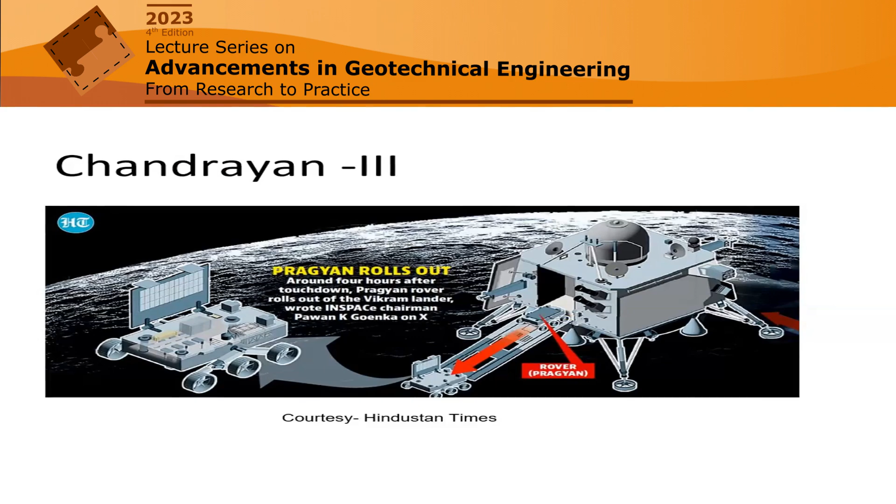So considering this, let me start with the recent news, that is Chandrayaan-3. If you look at the figure, which has become something everybody is talking about these days and has become news throughout, what it says, why we are very much excited about it, is that there is a scope - is it possible to go there and have some habitation? And that way it has generated lots of interest amongst youngsters, and in fact through this generation.

My topic is on Indian fly ash, but in fact, I have compared it with other fly ashes from different parts of the world.

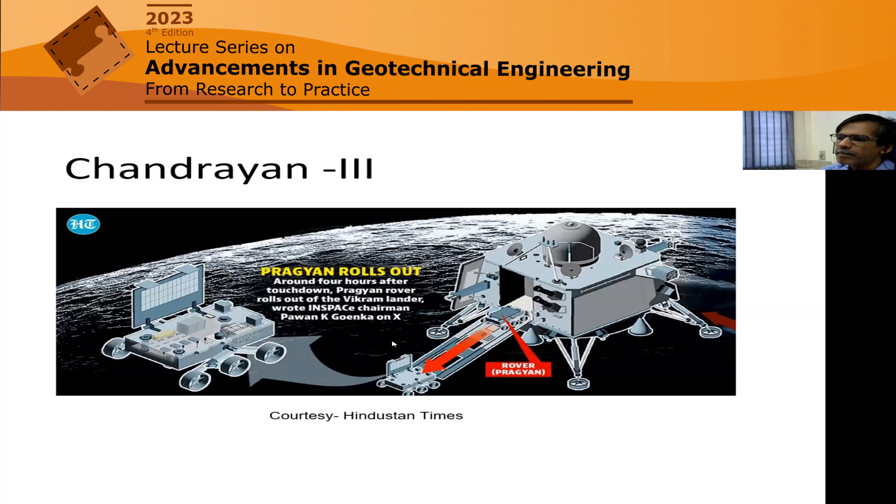What is this Earth? Because we are on Earth. Now we want to go to Moon, or we are saying we have got lunar soil. This Earth has been there so many years, and different peoples have tried to investigate it.

When it comes to chemistry or alchemy, this soil they found - in ancient India also, they said that this is a source of drugs. So for them, this earth or geomaterial was the source of drug. In fact, Ayurveda, another science of life, also said a good clay which has got very good fragrance is suitable for cultivation of grains and vegetables. That is good for life.

But when it comes to engineering, in the Indian context, in Sanskrit, they were saying Shilpa Shastra - that earth is required for us to build the structure.

And now, what do we call soil? The soil scientists say that it should be a mixture of organic matter, minerals, gases, liquid, microbes that can support plant and life. That's why when you say geomaterial, this is earth.

How am I getting it? Now if you see, we have got different sources: surface sand deposit, river sand deposit or marine sand deposit, and terrestrial hard rock deposit. Through this, we are getting the industrial building materials required, which is sand, gravel and crushed rock.

So as I said, earth can be the source for different professions, but for our profession as civil engineering, it is the source of sand, gravel and crushed rock, which is required for infrastructure development. Initially sand deposit was good, and we are still using it. River sand deposit is still continuing, but in certain places it is banned. Now we are coming to hard rock, which we are crushing to get our required material.

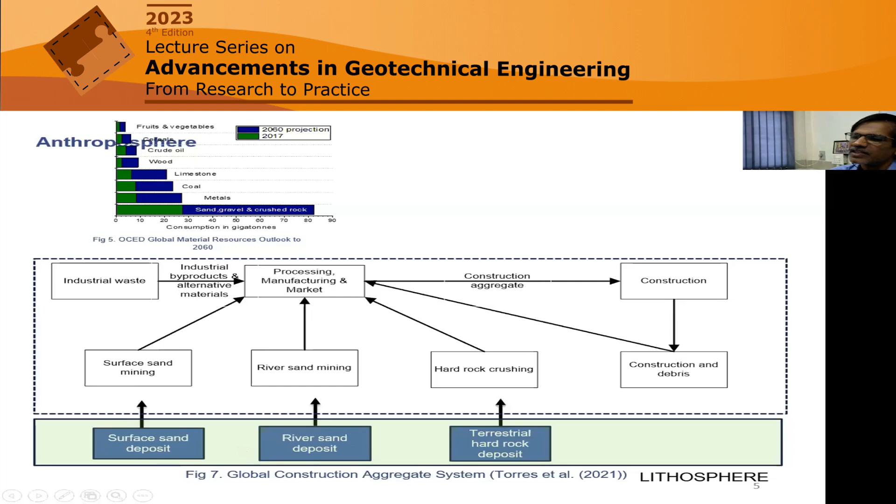Combining these two, what we are saying is sustainable geomaterial, from this geo-environment, what we call this earth, mother earth. So we are trying to go for mining for extraction of minerals.

The first one you'll see, pointed here, is an iron ore mine, and the bottom one is a coal mine. We need the iron ore or coal for industrial activities. While going for that, some of this is not useful, so we throw it, calling it mine overburden or tailings.

And when you go to industry, we have got steel industry or thermal power. Both of them, after producing steel or generating electricity, also have some byproducts. All these are dumped at a certain place, and if not properly managed, they create hazards. For that reason, we need to characterize these materials for valorization, so they can be resources as an alternative geomaterial.

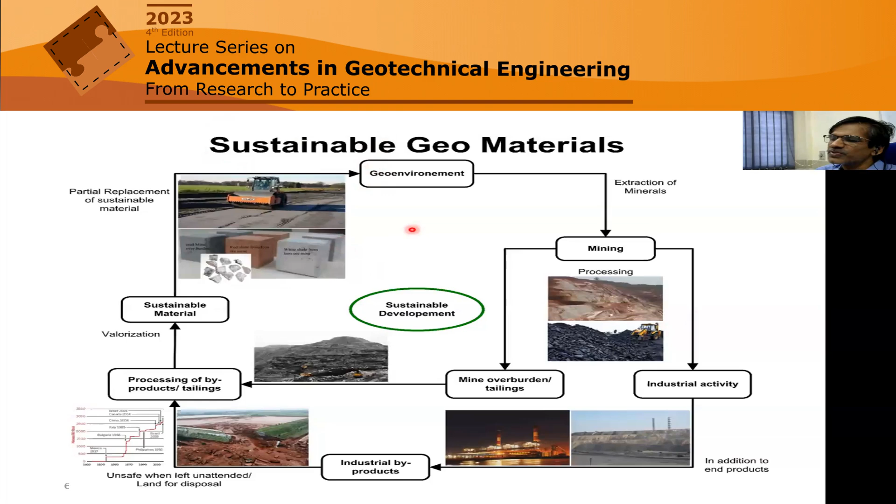Look at the Indian context. India has also signed the 2030 SDG goals to reduce carbon generation and so on. But still 71% of the electricity in India is generated by coal. The rest is by other sources, including hydro, nuclear or renewable resources.

So when this coal, and Indian coal has got a high percentage of ash, look at the generation of this fly ash, which is almost exponentially increasing over the years, from 1996, over 26 years. It's exponentially increasing.

Though we are trying to match the percentage of use in comparison to when generation was less and utilization was also less. In fact in the 90s it was only 5% utilization, now we have come to 90%. But since this is more than 260 million tons, even the remaining 10% is still 26 million tons unutilized, after using 90%.

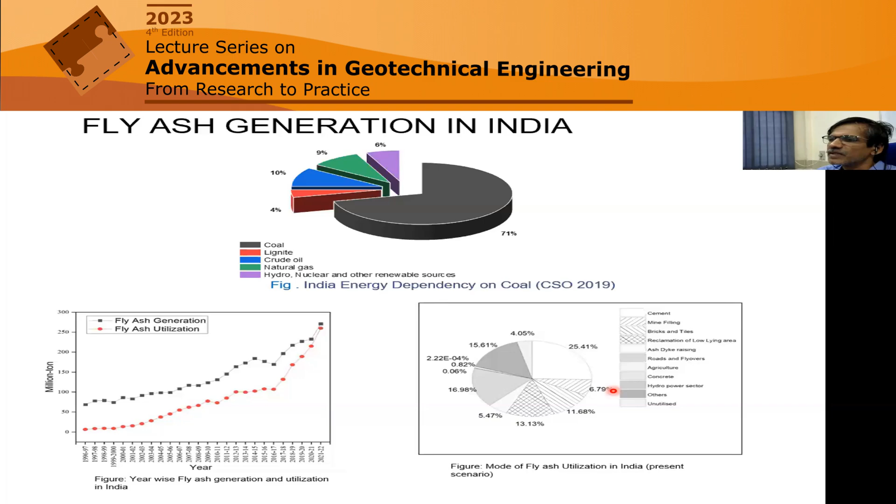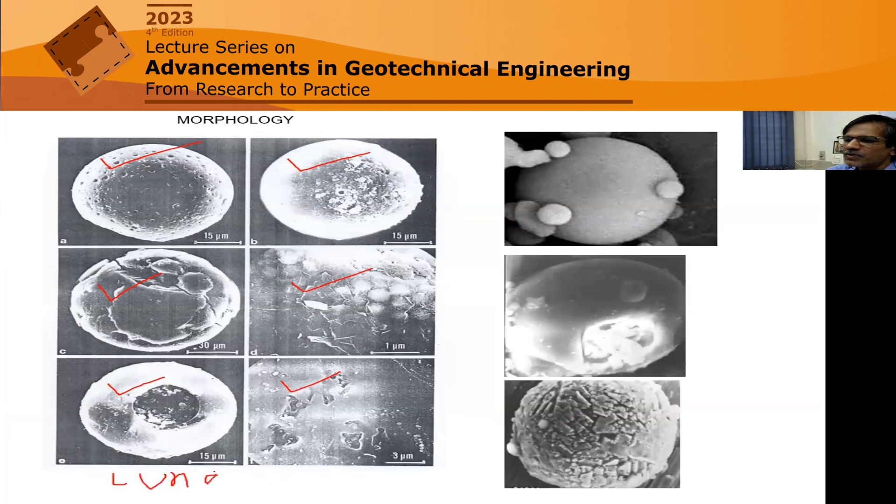So these are some of the pictures which I have visited and got. Now I have shown you two pictures of what we call morphology. You'll be really surprised to know that what you are able to see on the left-hand side is lunar soil. That's why I didn't label it. So this is lunar soil, and on the right-hand side is fly ash.

So just see, there are certain similarities. This lunar soil has been collected by Apollo and NASA, and you can get it from the reference books also. So here I wanted to say that there are certain similarities, so if you are studying this, you may be motivated to know its morphology.

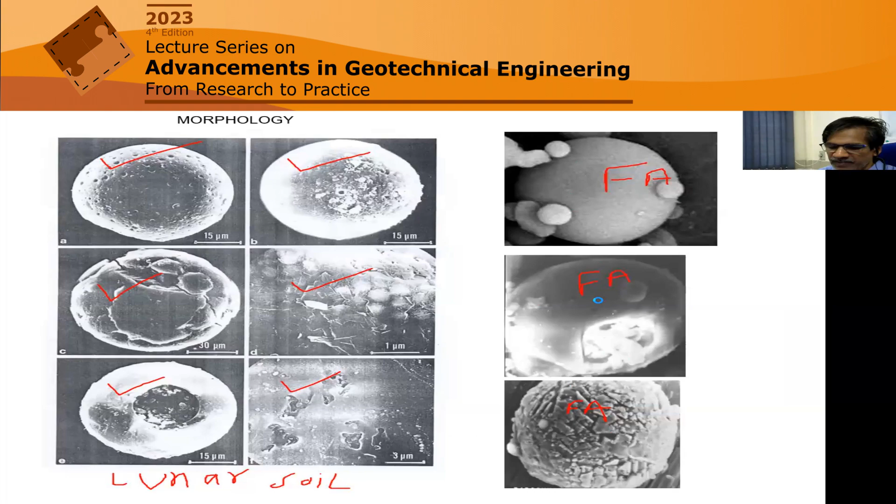Then again, for its utilization, we need to check. Because in the previous slide, the fly ash was looking very smooth surface. Here it was a rough surface, but in these two, it was a smooth surface. What are the smooth surfaces? In one of my investigations, I had dissolved it with hydrofluoric acid, which showed that it is mostly aluminosilicate. Inside, there is again a good structural spherical form on which the skeletal aluminosilicate glass was there.

So this indicates that the top surface is reactive and it can react. Whereas in some other fly ash, this was rich in iron particles, so it was not taking part in reaction the way the small patches were. They were being utilized for cementitious reactions, or because this was high calcium fly ash, it can be used as cementitious or pozzolanic, both. But in this case, it is only pozzolanic at the top surface. So this material characterization through morphological identification is important if you want to really study its utilization.

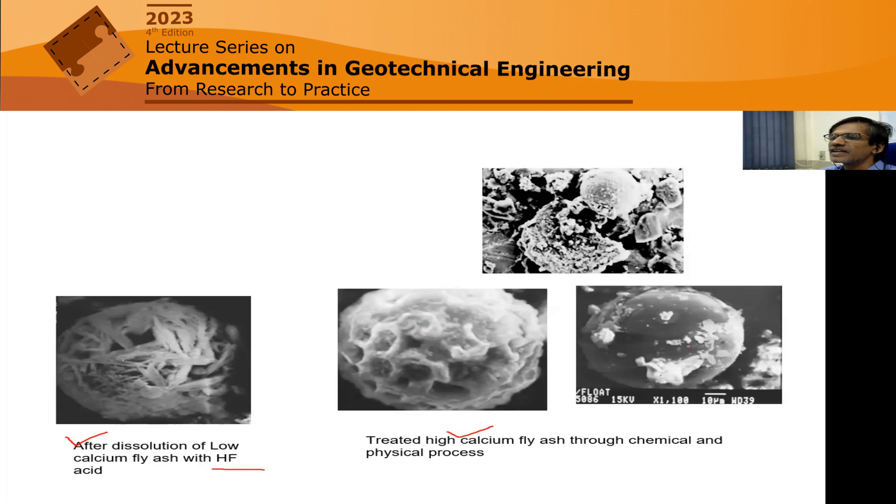Next comes chemical composition, which is again important. Here, along with fly ash, I have put all other industrial waste like bauxite residue, red mud, steel slag from the steel plant, ground granulated blast furnace slag, ferrochrome slag, iron tailing, bottom ash from the thermal plant, and overburden from the coal mine.

Look at the fly ash. If you see the chemical composition, it's not very different from common soil. Depending upon the type of fly ash, the lime content may vary from almost 0.5% to 30%, and magnesium oxide from 0 to 8.39%. In fact, this chemical composition is very similar to many places with soil we are encountering.

Whereas in comparison, bauxite residue is very high in iron content or calcium content, or in fact sodium content also, with very high pH. But this fly ash has got a moderate pH, which is an advantage. In fact, blast furnace slag also contains a very high amount of lime content, which is not a common characteristic of a general soil. Ferrochrome slag contains a good amount of magnesium oxide, which is expansive, and also chromium. Though this chromium is not carcinogenic, it is still a heavy metal, and higher consumption is not good.

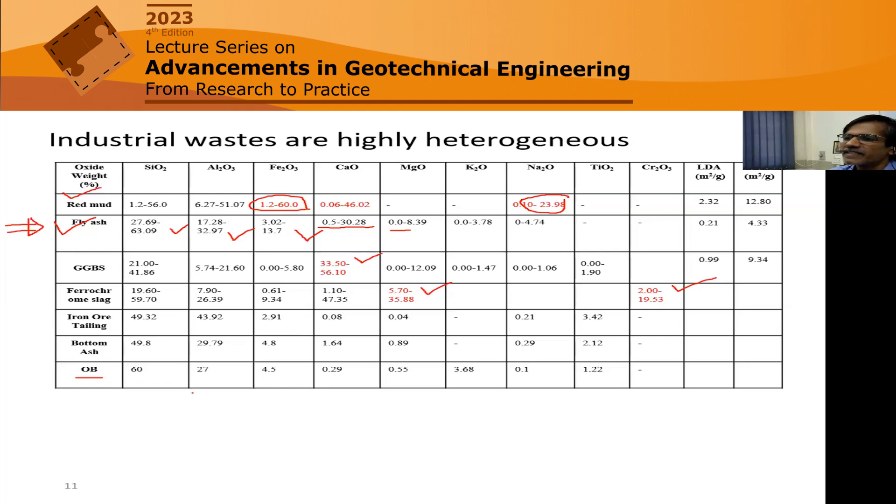Now we have got information about the fly ash. In fact, sometimes what we are doing with the fly ash may be helpful if somebody goes for this, but I am talking about, there are lots of things to be investigated.

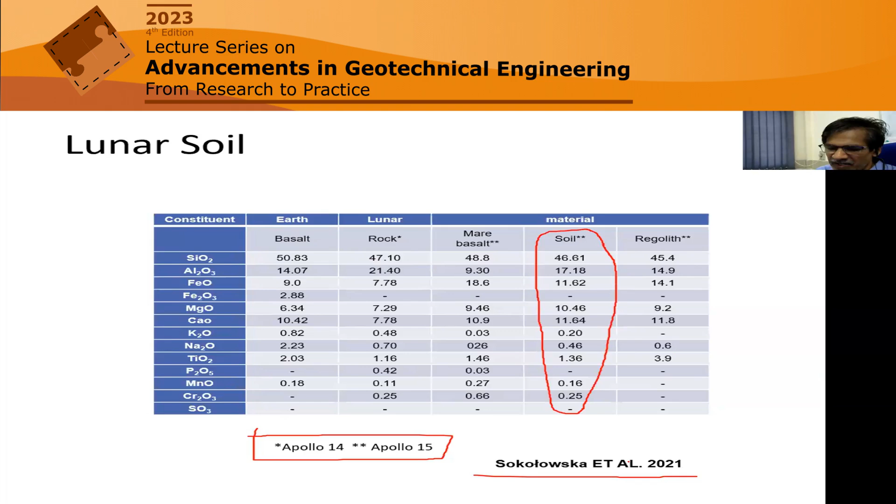Based on this chemical composition, initially, as per ASTM, it was divided into only two groups. Class F, which is rich in aluminum, silica, and iron content, more than 70%, but with a low amount of calcium oxide content, maximum 4 to 8%. Whereas the other group was Class C fly ash, where the silica, alumina, and iron content is less than 70%, but the calcium content can go up to 32%. So this was the initial classification of fly ash based on chemical composition.

But now, further, it has been divided into different groups. This will tell you also its basicity and acidity based on the composition of calcium, magnesium oxide and sodium oxide, which are alkali compounds, or alumina and silica compounds, the acidic compounds.

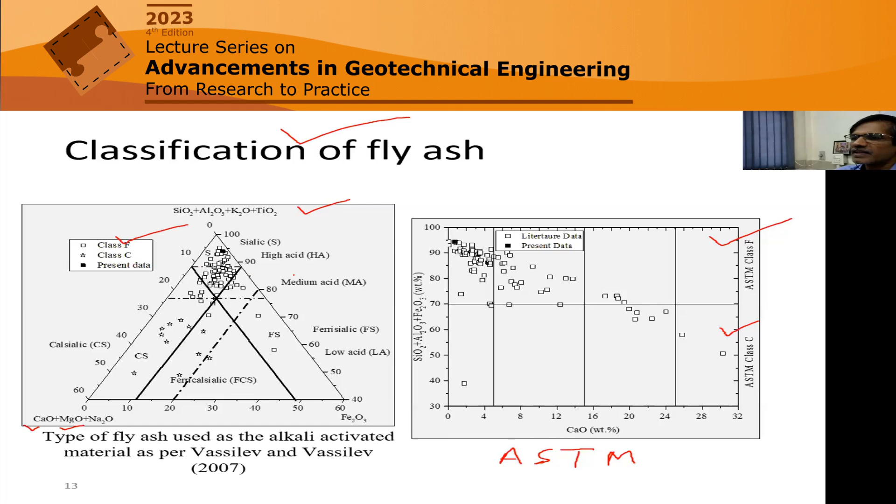Based on this, if we go further, what we call mineralogy explains the glassy phase in it, which in fact is responsible for the chemical reaction or pozzolanic reaction. The pozzolanic reaction, by definition, should be in glassy phase. Because the major portion of the fly ash is in glassy phase, we call it also pozzolana. In fact, when we add it into cement, we say Portland pozzolana cement.

So here, to know what type or how much percentage of glassy phase is there: if you go to the lime content, it tells you the position of this, so this will tell you what is the type of glass. Second, if you take a molar ratio of potassium oxide to aluminum oxide, it can tell you what is the glass content of it. So you need two things: what is the type of glass and what is the quantity of glass or glassy phase.

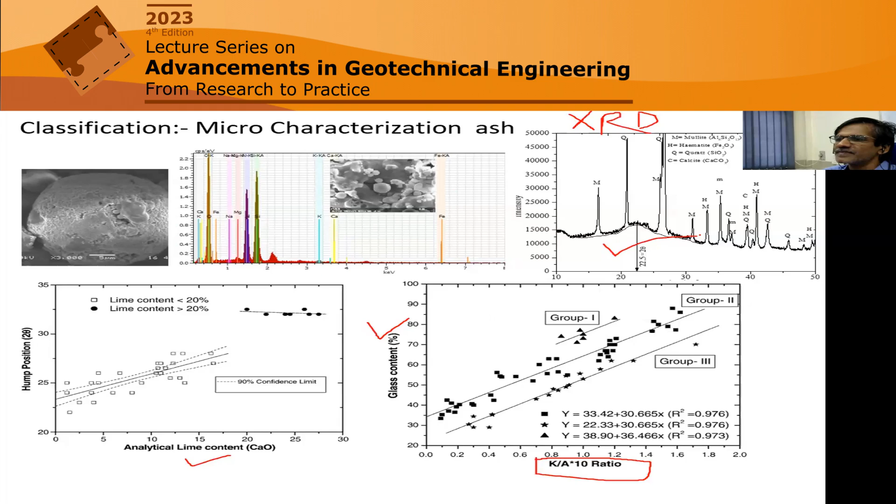Next, to be again very specific to geotechnical engineering, because I was saying geomaterial. Geomaterial, as I said in the very beginning, can be used in construction of buildings, in cement, or in other places, and for the soil scientist as a source for plants. But when it comes to geotechnical engineering, we become very specific. We take its percentage of clay, silt, and sand size, and accordingly we try to define the soil as a clay soil, silty soil, sandy soil, or a combination of all these.

So here I have shown some of the sources of fly ash in India, where the variation of silt, clay, and sand size is presented. If you see, mostly it is silt size particles. Major portion is silt. What else? The specific gravity is very low compared to standard geotechnical material, where we say 2.65 for sand and 2.7 for clay. But in this case, it can go down to 1.95. So this is not what we get for natural soil, so accordingly, the soil classification will be different.

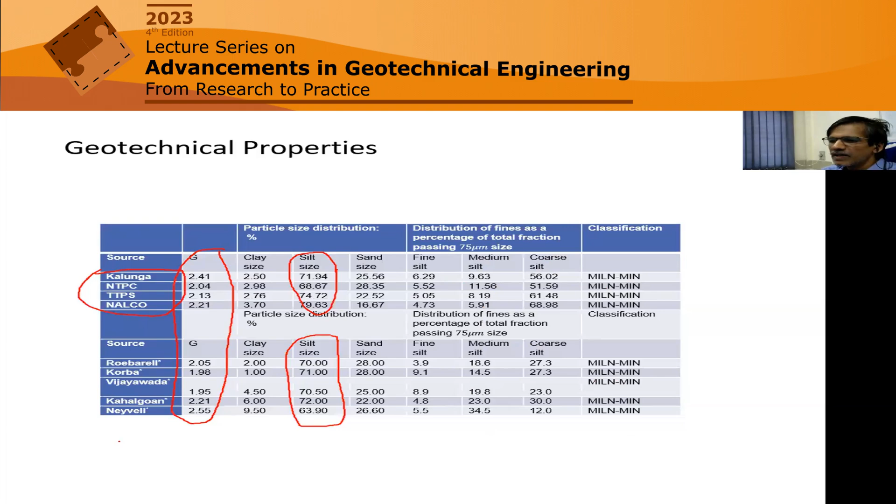So less could be the dry density, because initially in our geotechnical construction for embankments and so on, there was some restriction on what should be the minimum density of the soil to be used for embankment. So for that reason, we are investigating what should be the density of it. I mean, sorry, what should be the maximum dry density of it?

Another issue is that in the same plant, there could be lots of variation in quality control. It's not like a borrow area soil you have taken, where the OMC and MDD remain constant. These will vary depending upon the fluctuation in the power also. That will give different types of fly ash. So quality control is very important when you are particularly using a particular source of fly ash.

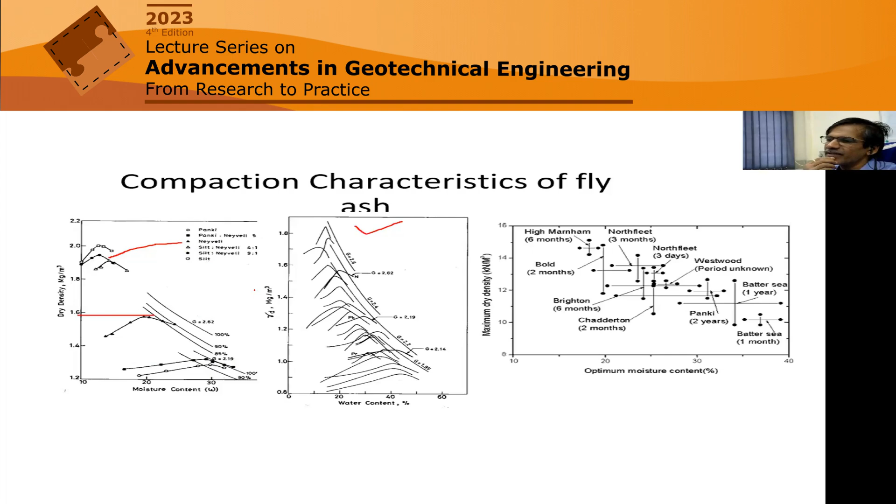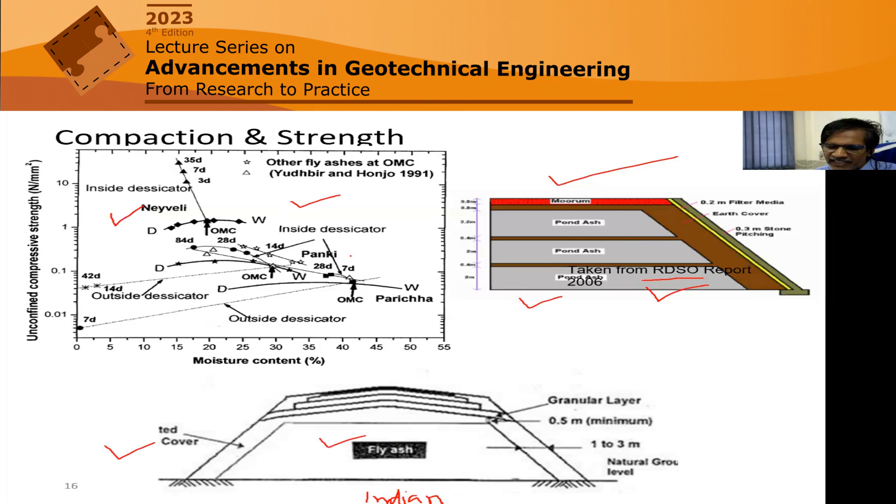So here, if Portland cement was rich in calcium, this geopolymer has a very low amount of calcium. And I have shown you the diagram for the chemical composition of fly ash. Low calcium, but it has a very good amount of aluminosilicate, which is the major requirement of this geopolymer. So for that reason, it is now being tried, at least at laboratory scale, to be used as a precursor for this third generation cement called geopolymer.

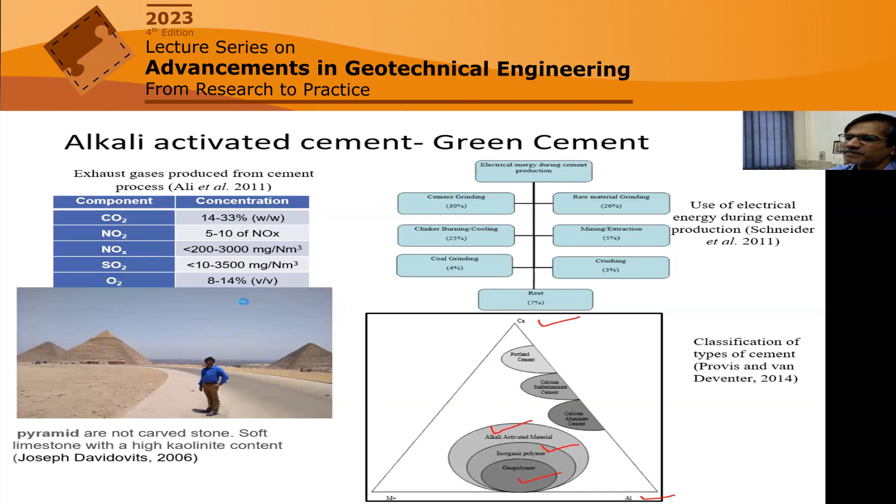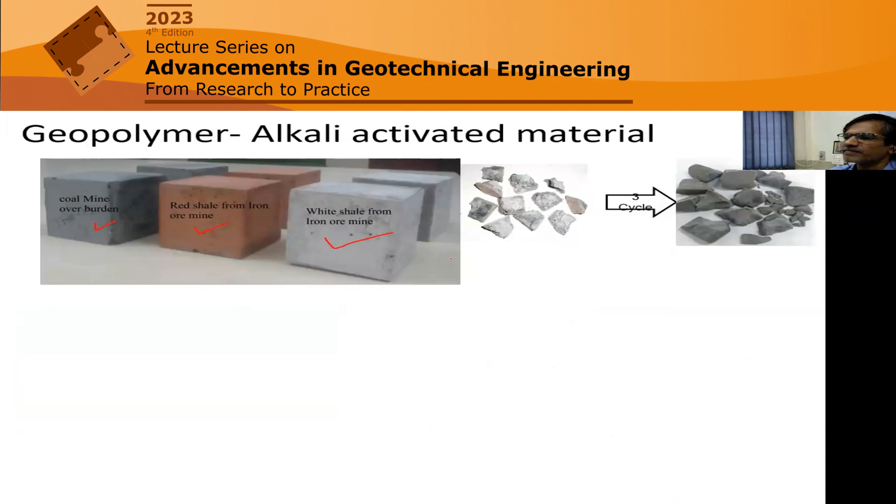So it's not a very common material in geotechnical engineering, and it is basically not part of concrete, though we say it's prepared similar to a concrete material, but the strength is less. So we use ordinary geomaterial with the strength varying from 0.5 MPa to 8 MPa. Whereas concrete, they start with minimum 20 MPa.

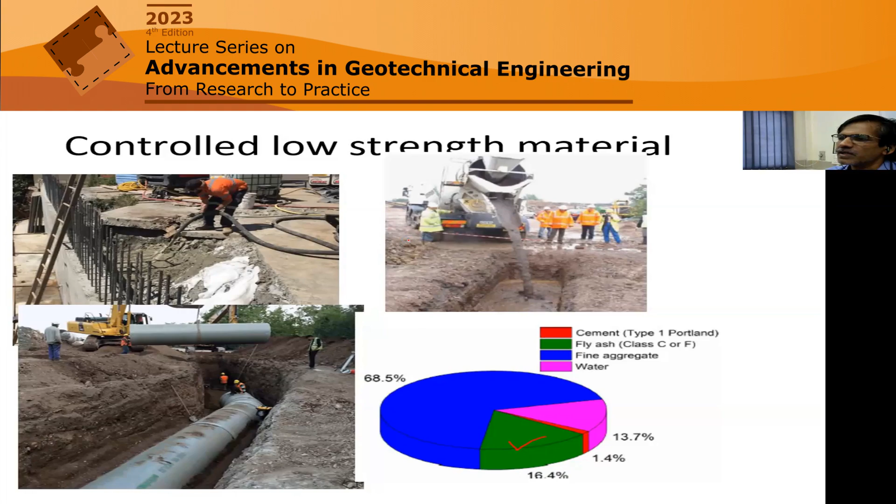So these are some of the guidelines if you are going to use CLSM: that it should have good flowability characteristics. It should have a setting time like that of a cement. It should have a good unconfined compressive strength like that of a soil. It should not affect the nearby structure also. It should have good resilient modulus if you are using it for unpaved roads. It should have good CBR if you are using it for the base or sub-base course. And also water permeability for base and sub-base courses.

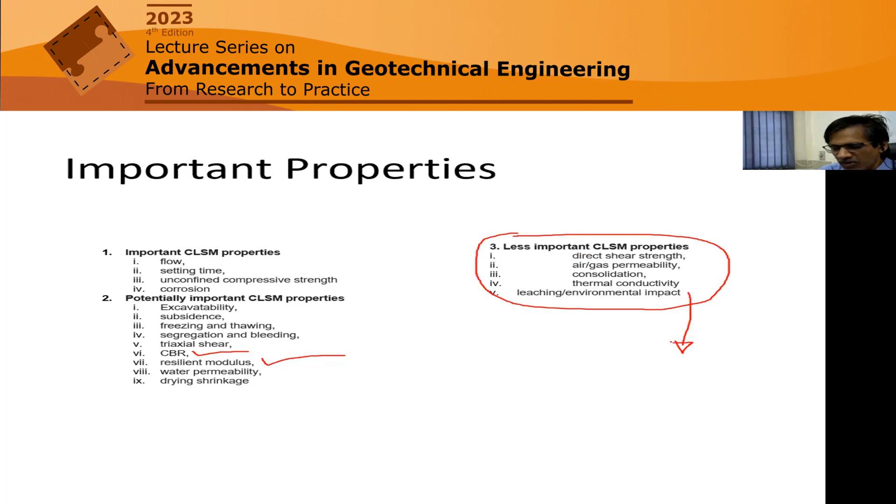And the less important CLSM properties are like direct shear strength, gas permeability, consolidation. But the leaching impact, initially when this recommendation came, was not taken as important, but now it has become important.

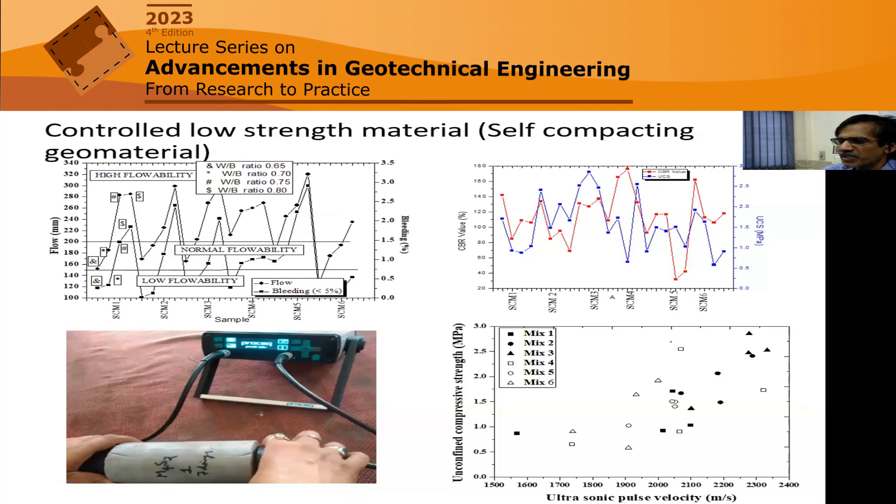So this is one typical study on controlled low strength material, where fly ash could be the major material to increase flowability. And this is possible because the particles are spherical in nature. That's why it is also called a mineral admixture. So the spherical particle is not good for its geotechnical properties, but it is good for its flowability properties if you are using it for low strength material. So with this blending you have to be very careful how much material you are using.

Now, before closing, when we were trying to use this fly ash, initially it was only going through its chemical mineralogy, strength and other properties. Now it has become more important to check the sustainability aspect, where its environmental impact, economy and social acceptability are to be considered, leaving aside the technical part. And this material comes immediately from the power plant, within an hour or half an hour, in comparison to natural soil, which has been regenerated over millions of years. So this resilience aspect has not been considered and now needs to be considered.

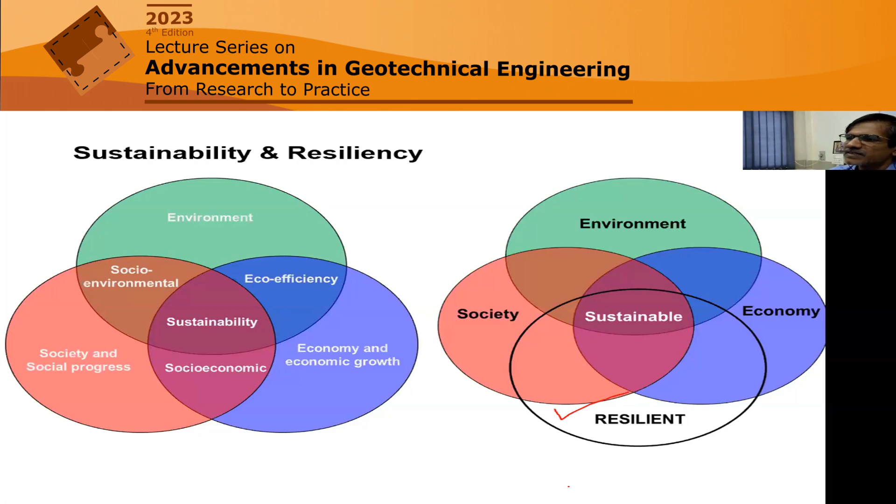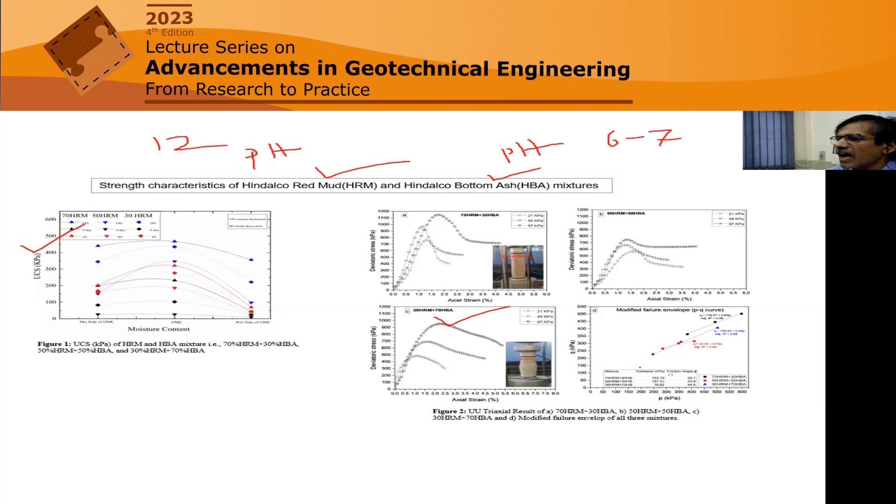So here I'll try to show some of this, considering sustainability, when I try to use bauxite residue stabilized or mixed with bottom ash, because here the pH is high, pH is 12, and here the pH is low, close to 6 or 7. So we try to blend it to get a different material, and we check the strength, stress-strain diagram, and the other properties. But that is not sufficient. First you have to check its durability under different conditions, particularly wet-dry cycles, and how much strength it gains after 12 cycles.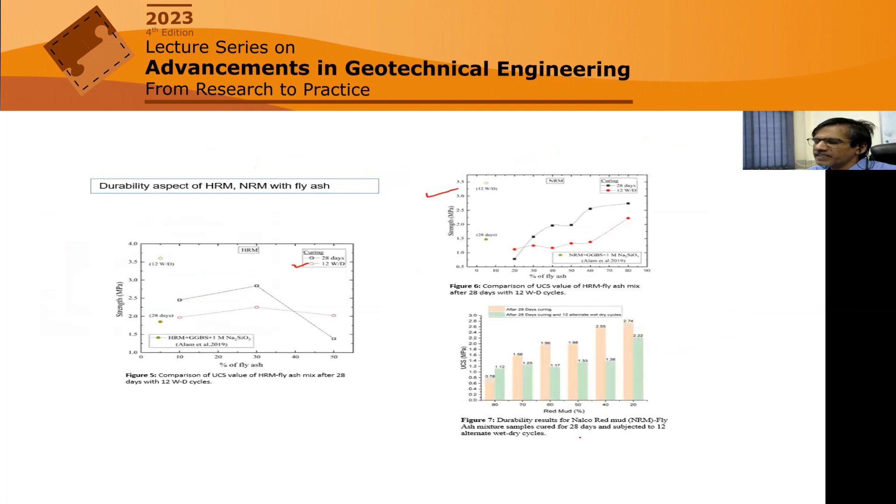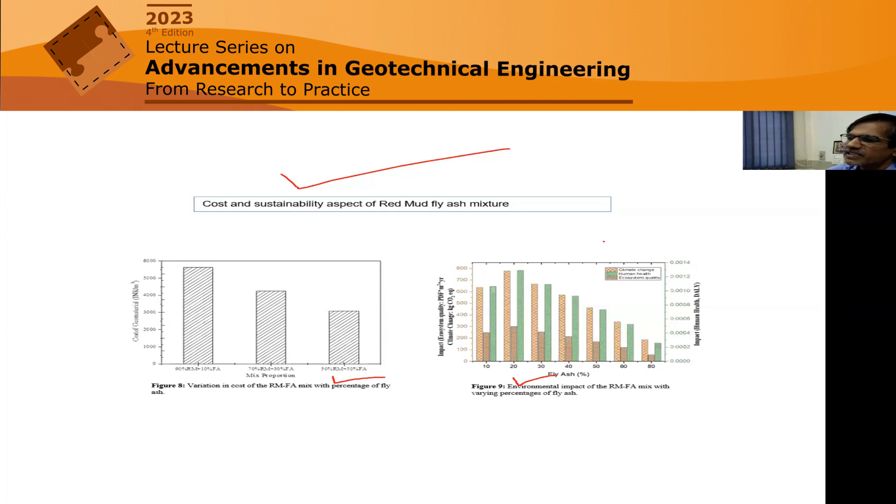This is what we call sustainability. Cost wise, for different proportions, as I'm increasing the fly ash percentage, the cost is less, and the environmental impact is also decreasing as I increase the fly ash. So this extra aspect now needs to be considered. I don't want to present this study in detail, but this has become an essential aspect of any study on utilization of industrial waste, including fly ash.

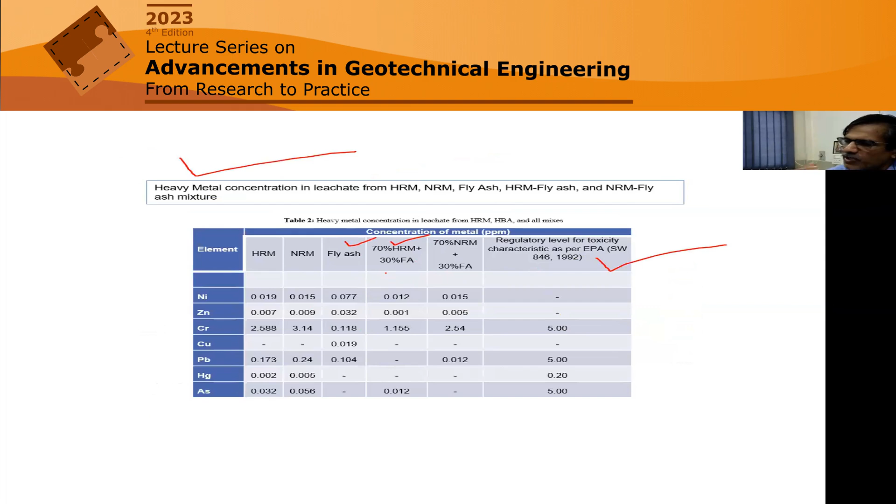So with this, I'll come to the conclusion: though we are all committed to reducing the carbon footprint, as we are still depending upon coal as the major source of energy, fly ash is the major industrial waste in India. As I said, for any material, we need to look at different angles for its utilization. So if you are looking at its utilization as a geotechnical engineering material, or as an aggregate in the construction industry, then you have to be very specific about these characterization aspects.

Finally, all the time I say this statement: we are still ignorant about this fly ash. That's why people are still calling it a waste, or whoever is producing it feels it as a burden; it becomes a liability to them. But if we can really characterize it and gain sufficient knowledge, we can convert it into wealth. So for the corporates who are producing this fly ash, it will be a resource instead of what they are calling a liability.

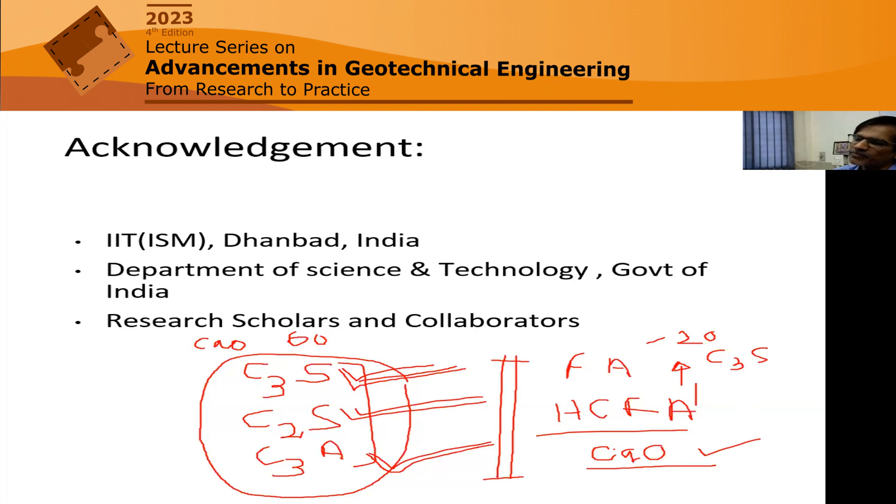And the other one, sometimes what we get is apparent cohesion. In that case, if you put it again in water, part of it will get dissolved, the pore space will fill up with water, and then it may lose the strength. So that's another aspect of this fly ash material.

I'll say no, because the amount of material to be used in concrete is much less than if you can find its use as a soil. For concrete there is no issue, but the quantity used will be much less compared to what we use as a soil.

Our institute started as the Indian School of Mines in 1926, along the same lines as the Royal School of Mines, London. And since then, it has been the pioneer in earth science, mining and minerals in India. In that aspect, in the hub and spoke model, mining acts as the hub, and civil engineering many times acts like its spoke.

So we have helped in the utilization of mining and industrial waste, and in helping the mining industry increase their productivity in terms of stabilization of dams, stabilization of tailing ponds, and utilization of this. In fact, in development of the infrastructure, civil engineering has taken the lead in all these things.